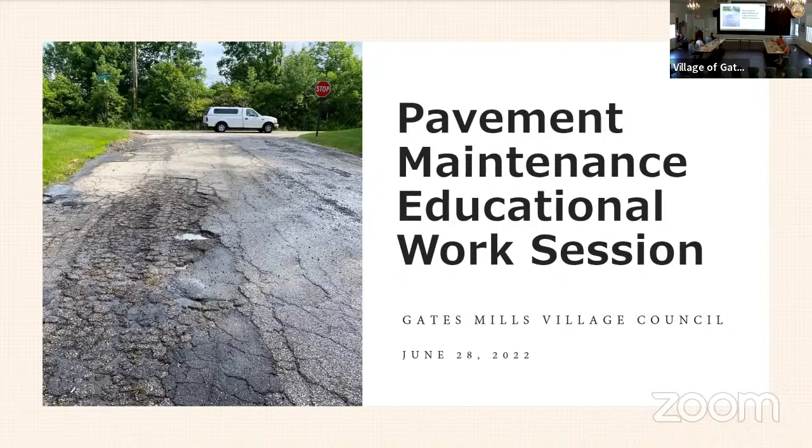Okay, so one of the things you'll learn about me is some people indicate that I'm the strangest friend that they have. My wife calls me a big goofball. I'm also a huge SpongeBob fan. So anytime I have an opportunity to work SpongeBob into a presentation, I do so.

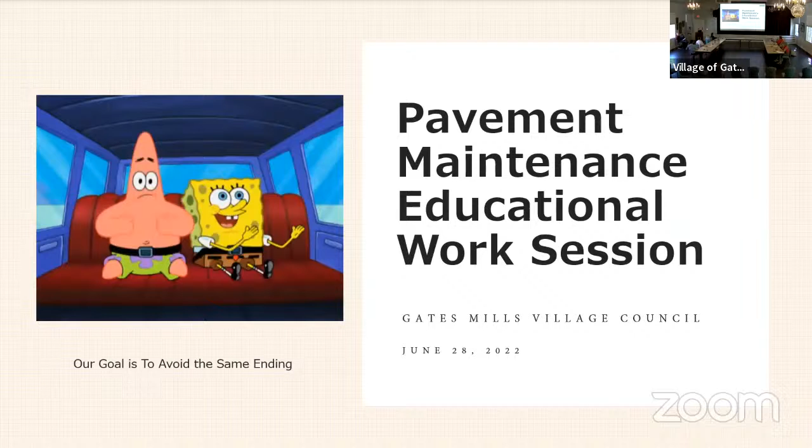SpongeBob's mom, by the way. Please stop touching my head. Let's all sing the road song. I wanna sing it all day long. Let's all sing the road song. Let's all sing the road.

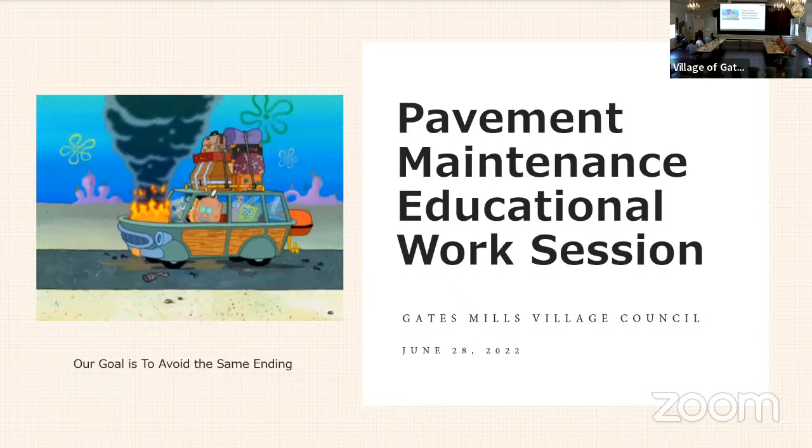Okay, so we want to avoid that. We want to avoid that ending with what we're doing. So if you have not been introduced to SpongeBob by your grandchildren or your kids, you now have, and I would highly recommend him. He's hilarious.

So there's a couple of things that we want to try to accomplish this evening, and that is to educate council about what road maintenance is, how it works, what the approach of it is, how we are talking about a philosophical shift in the way that we're approaching our road program in the village. Historically, we've allowed the budget to fulfill the need. We've used the money that we've had available to address as many needs as we can. We now have, through a village-wide pavement assessment program, determined need, and we're going to be discussing a budget number or numbers that would be appropriate to meet that need.

Also, what we hope to do is better prepare you to answer questions from villagers regarding their roads. People generally call and say, my road's in terrible shape. What are you going to do about it? And we now have better numerical data that ranks all our roads from worst to best. So if somebody calls and says, my road is terrible, that may be beauty in the eye of the beholder. Their road may be very much midway in our roadway condition as compared to others. So I hope to prepare everybody to have those conversations and have better data to do it.

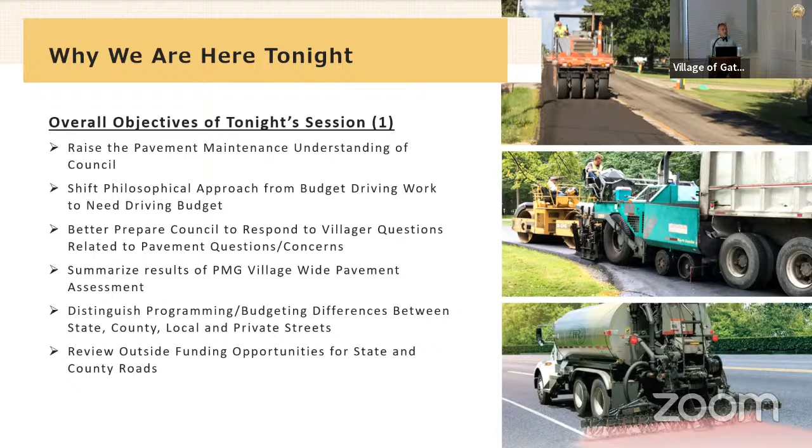I want to summarize the pavement management group roadway assessment that was done for the whole village, talk about some differences with the way that roads are programmed. Local streets are handled very differently than state and county roads from a rebuilding standpoint, and explain how those work a little more completely, along with discussing how outside funding opportunities work for state and county roads.

In addition to that, we want to talk about the pavement management life curve. Every road, and there'll be some graphs later on, but a pavement has a life. And the more effort you expend in maintaining that roadway, the longer it will last. Hence, you can extend the curve out further and further, maximizing the time before you have to get involved with the complete rebuilding of the road. And that's ultimately our goal of roadway maintenance, is to extend that timeline before we have to get in and completely rebuild a road for as long a period of time as possible, thereby trying to save some dollars in the meantime.

I'm going to talk about what a framework for an annual road program looks like, given the data that we now have based on a PCI, or pavement condition index, approach to looking at the roads. I want to discuss the overall objective that we're going to hopefully have, which is to raise our pavement condition index average for the village over time. Right now we're at 62, and ultimately what we'd like to do is get it up to 70, which is the low end of the good range.

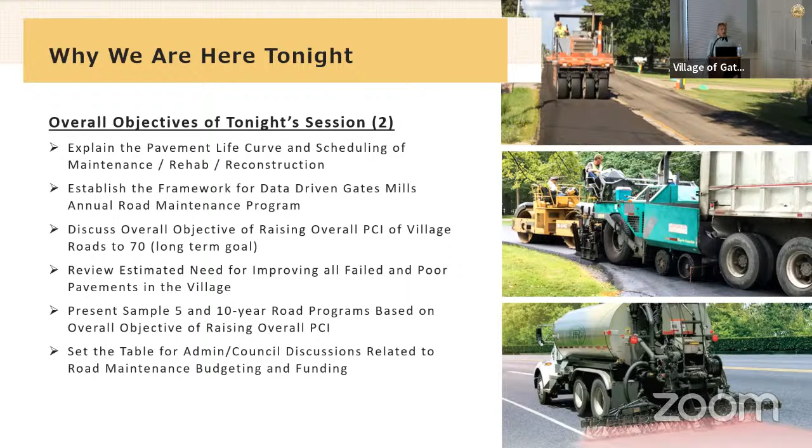Want to review the estimated need based on the pavement condition index analysis that was done. So we calculate what the total need is in terms of dollars to reconstruct roadways that are in the worst shape, and also present sample 5 and 10 year road programs based on the overall objective of raising the PCI. This sets the table for council to have meaningful discussions on 5 year, 10 year, how many dollars per year, whether we attack a certain type of road first, or segregate them into more discrete groups and allocate more dollars towards high volume versus low volume roads. That's the overall objective.

This may look familiar. This is just a brief overview of the presentation I did previously, talking about the pavement management group and what the benefits are of their program, really getting us to a consistent analysis of the roadways using a uniform process and artificial intelligence, as opposed to potentially different people looking at roads under different weather or environmental conditions, and having variability in the analysis that we can now remove. So we've got a much better analysis process in place.

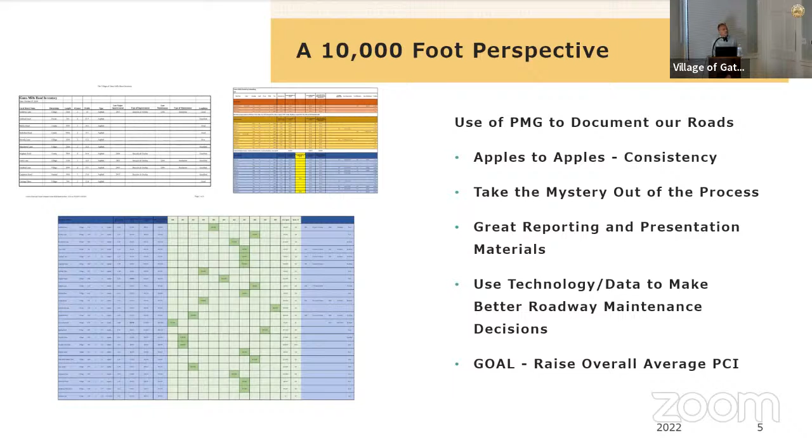Ultimately, what we're trying to determine is the best points in time and how many dollars we're going to be allocating to these various pavement maintenance activities. Reclamite and crack seal are used on newer roads that are in better shape to help extend the life - they're low cost treatments that can buy a lot of time towards the end of the pavement life. When you get into the more middle PCI roads, things like chip seal, fog seal, thin overlays, milling and filling either partially or the whole surface. And when you get into the lower PCI roads, it comes time to rehabilitate or reconstruct them.

The difference between rehabilitation and reconstruction would be, rehabilitate would be like what we did on Deerfield and Riverview last year, where we did a recycling of the existing asphalt and then overlaid it, as opposed to a pavement that may not be suitable for that, where we've got to reconstruct it, tearing out the whole road and starting from the bottom up.

So really where we are.

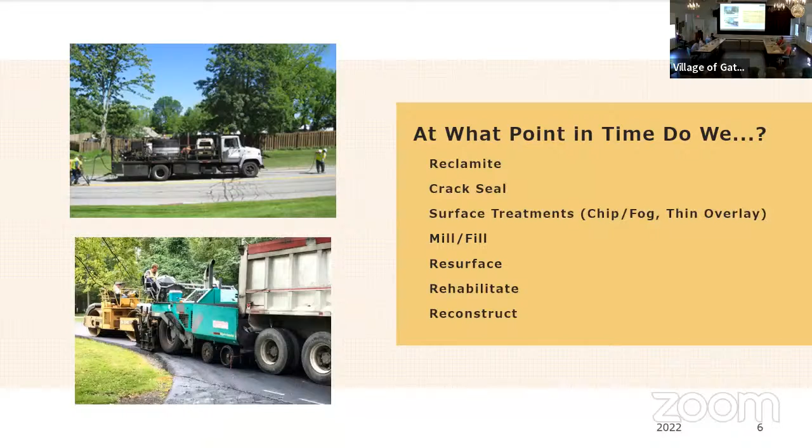Yeah, I've got that a little bit later on as I get more in detail on the pavement maintenance methods.

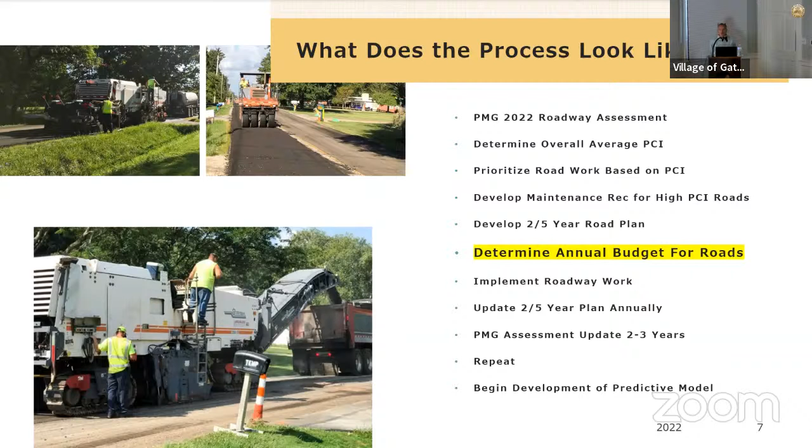Really, we've completed the roadway assessment, which I'll summarize in a minute. This evening, we want to discuss need and budget, as well as elevating the knowledge of council regarding the whole process. So that's really the focus of what we're looking at today.

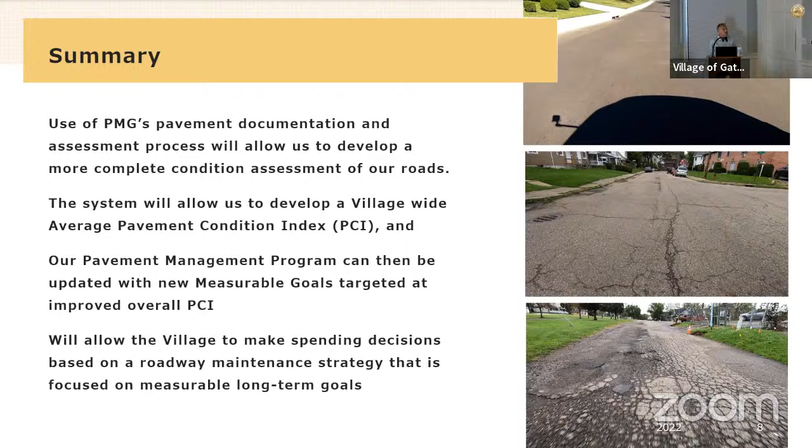So just a summary of the pavement management group, and what it will ultimately allow us to do - make better spending decisions based on a strategy that we've determined in advance, as opposed to being more reactionary, a strategy that's based on the long-term goal of raising the overall PCI, or pavement condition index, for the roadways in the village. That's the home run we're looking for.

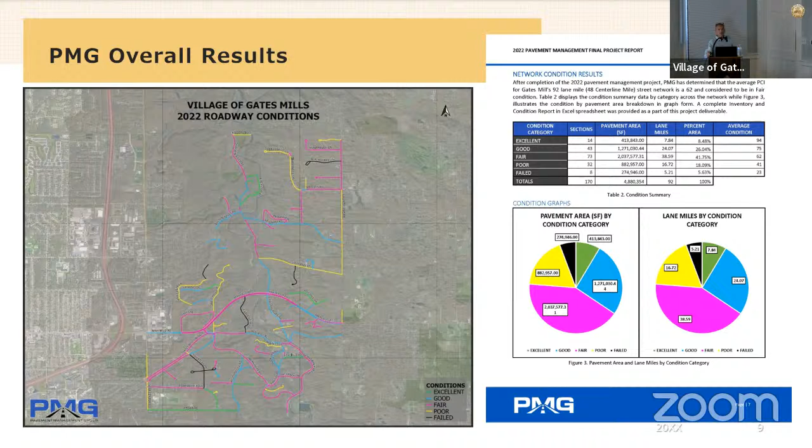So you can see that we've got a number of black roads which are considered failed, in need of either rehabilitation or reconstruction. Yellow roads are in poor condition, on their way to becoming failed. Really, everything black and yellow fits into the rehabilitation reconstruction category. Everything purple, blue, or green is either middle of the road or in very good shape, where we would employ life-extending methods to try to get them to last as long as possible before they slip into a failed or poor category, black or yellow.

Critical items we're looking at here—I've got a chart I'll go over next—but our overall pavement condition index is 62. That's how we came in for the entire village, averaging all village roadways including state and county roads, which I'd call pretty typical. Engineers I've talked to, when they've had this analysis done in their towns, have been in the low 60s overall. That's weighted by length of the road—a weighted average based on pavement area and condition.

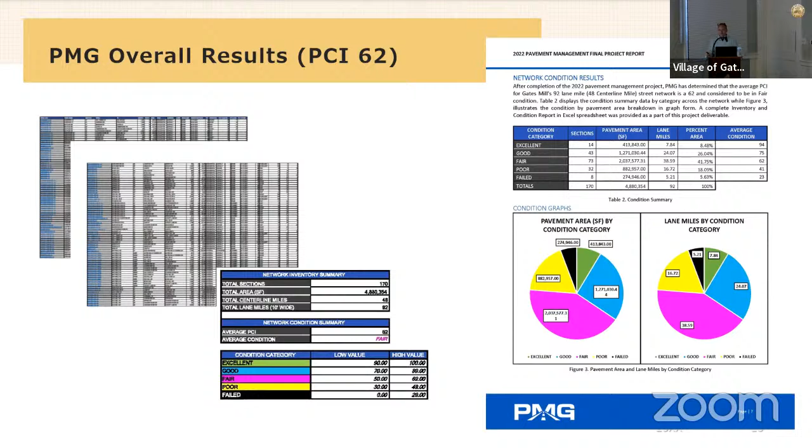So talking about lane miles, just to touch on that - Mayfield Road is 4 lanes wide, so 1 mile of Mayfield Road is 4 lane miles because it's 4 lanes wide, just so everybody's aware of that.

Looking at our lane miles by condition, you can see we've got 22 lane miles of poor or failed pavement. Those are the critical categories we're really looking at that warrant reconstruction. The other categories - excellent, good, and fair - are ones where we can use non-full reconstruction methods to extend their lives. That's a key part of the program: we want to invest money in those roads early in their life to extend their life before we get into fail or poor. I've got some graphs that show the pavement life cycle and how that works.

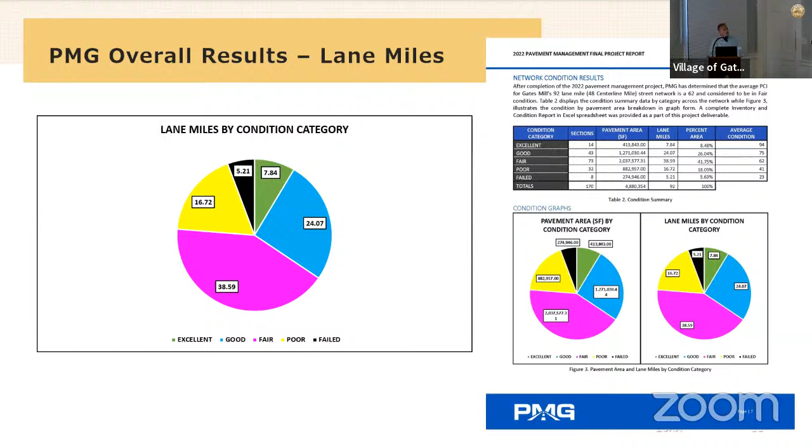The PMG evaluation is purely on the surface, right? Other than looking at surface deflection, their program wouldn't identify a load-based failure. It's based on video and then artificial intelligence analysis of that video. They don't do any coring or anything - that would come through the design process.

Chris, how does the 62 overall average compare to other villages around here, like Hunting Valley or Woodland Hills? I'm not aware of anybody in close proximity that has had it done, so I can't answer that question. But an example I've used in the past is the city of Green down around Akron. I've got a good friend who's the engineer down there, and I've talked with him extensively about this and his staff. They had their first analysis done - it came in at 63. They've got a pretty extensive road network, so I think generally we're about where the average would be.

Som Center is being redone right now. When that's done, the arterial or state route PCI will be up to 70 - right at the target number for our state routes, with the work done on Mayfield a couple years ago and now the work being done on Som. There's also some work we could potentially do on Chagrin River Road south of Old Mill next year that would elevate the county road PCI to 70 as well.

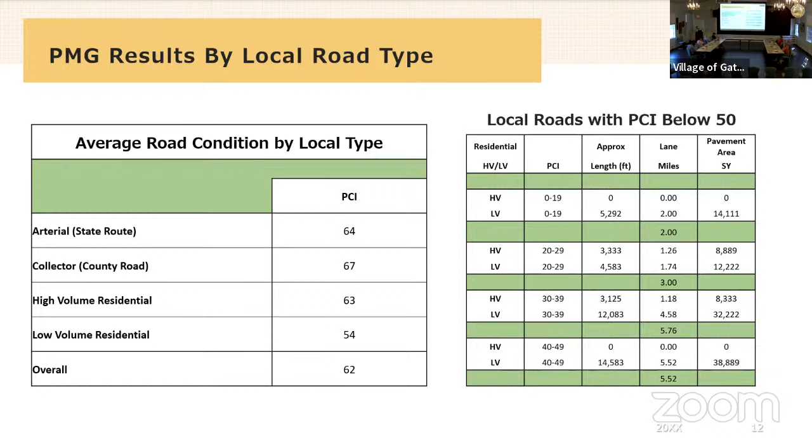The city of Kirtland, we developed an overall road rebuilding program for them. They didn't use a pavement management group, but more of a feet-on-the-ground approach to doing the pavement condition ratings out there. There's a $16 million 10-year program they're presenting to the voters, totaling about 16 million over 10 years. That's basically what my question is.

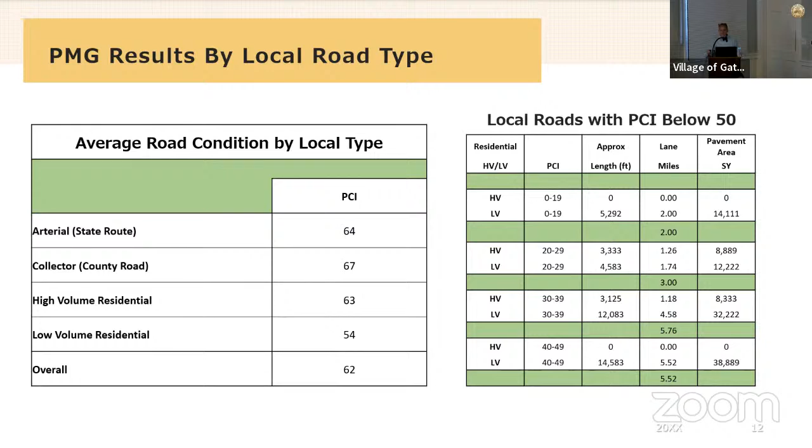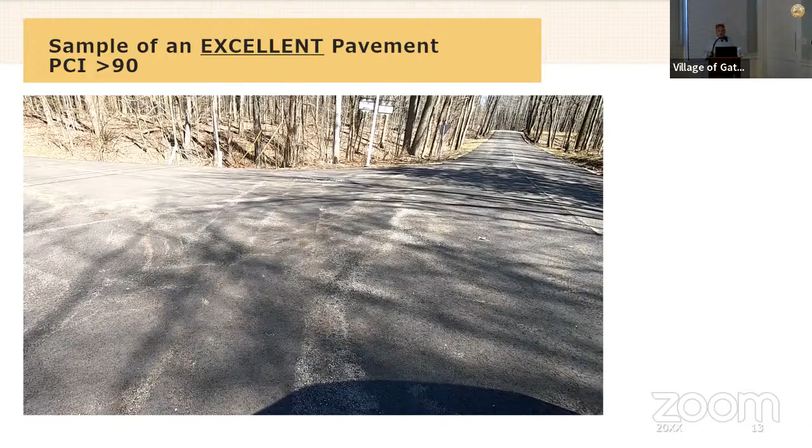So here are some roadway condition samples I'll show you. The first is a condition sample of an excellent pavement. This is a roadway we just redid last year. Don't mind the plow scrapes and rust on the road, but you'll see the pavement integrity is pretty good. This is Fox Hill. Those brown lines are just from the plow riding on the asphalt, but there's no real cracking on the edge. The pavement's in pretty consistent condition, with a PCI above 90, so it falls into the excellent category.

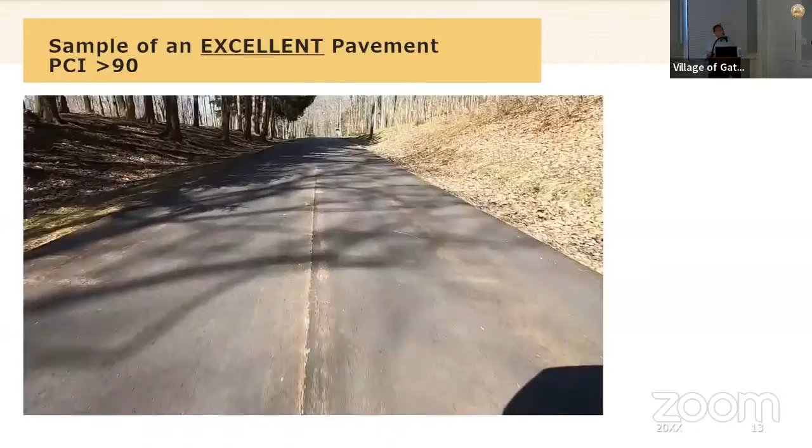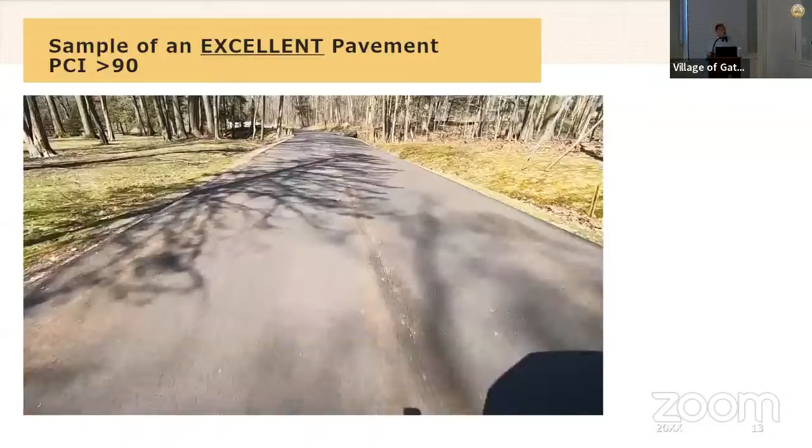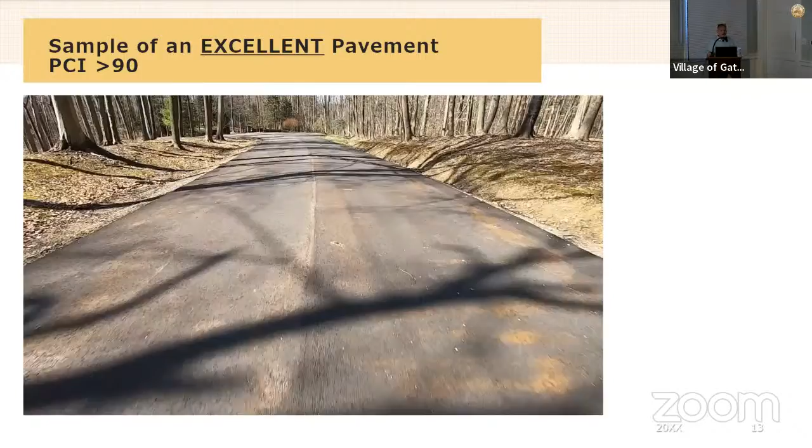So this year, as part of what we're doing, we'll be going in and applying Reclamite, which helps rejuvenate the asphalt, giving it back the things driven off when the asphalt is heated. It helps keep the surface pliable and extends the life of the pavement. That product goes down for about $1 a square yard, and it can extend the life of the pavement. If you do it every few years, you can buy 10 years at the end of the pavement's life.

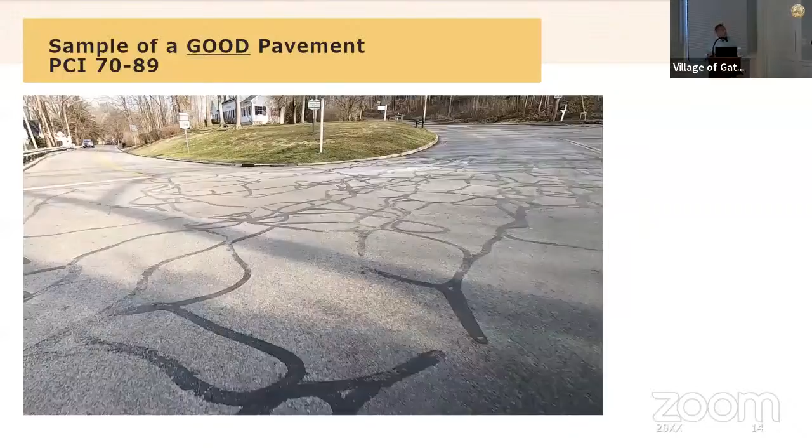Here's an example of a good pavement. This is Chagrin River Road north of Old Mill, the part that was redone by the state a few years ago. So you see we're starting to get some cracking. He's not driving down the middle of the road, the camera hangs out, and you'll see him swerve into it. Yeah, the first time I watched these videos, I had my heart in my throat.

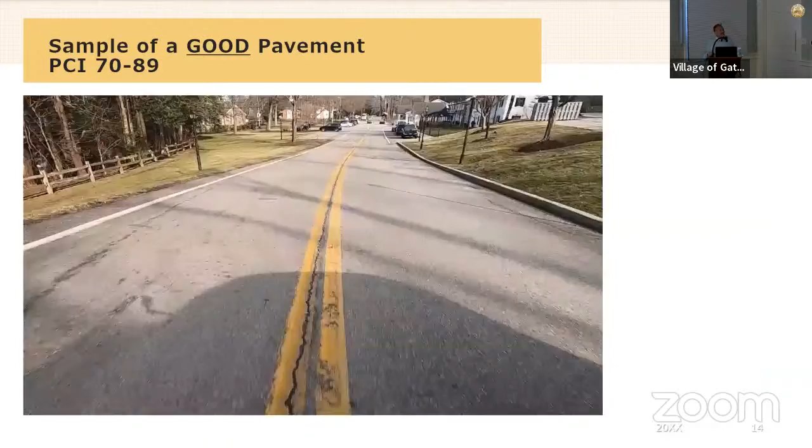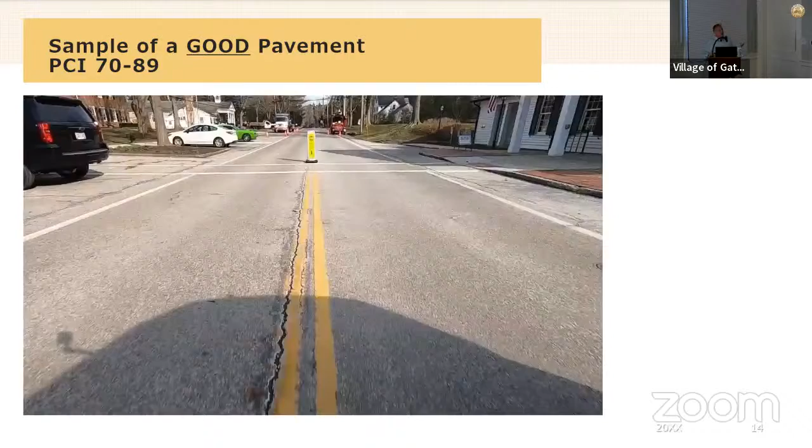You see some cracking along the center line. That's where there's a construction joint, where the two asphalts butt up against each other in the middle of the road. You're going to see some cracking, which is an identification point, we've got to get in here and start crack filling because we want to fill those cracks and stop the water from migrating down into the road.

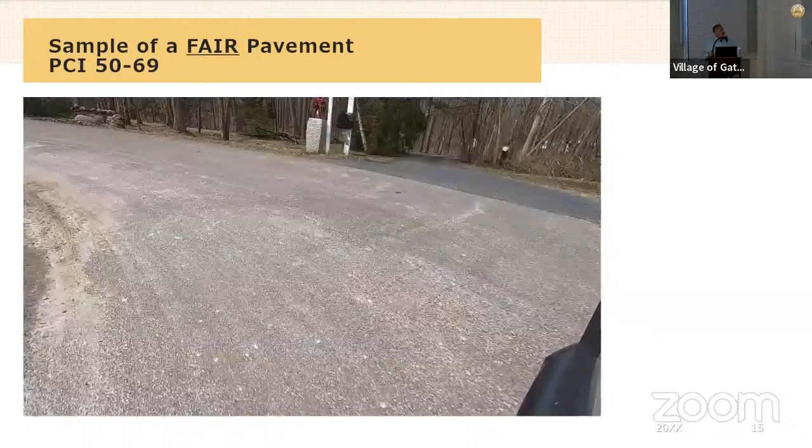Here's a fair pavement. Nice work, Karen Lane. That trench is a repair we made when we did the storm sewer work and regraded the cul-de-sac a couple years ago to fix a drainage problem. So this part of the cul-de-sac is in pretty decent shape because we just did some repaving. But the rest of the road, you can see that edge cracking I was talking about, which is pretty predominant along the edge of the road.

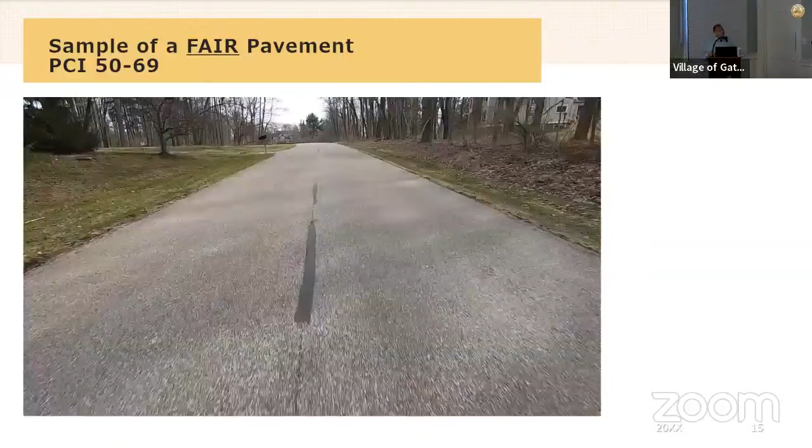That's pretty indicative of a base problem, so that's where you'd get your load-based failure. Just to pause, what would we do on this road to maintain it and prevent it from falling off the edge? So it falls into the fair category.

What I'd suggest in these instances would be a good candidate, not for full reconstruction or full rehabilitation, but this is where we'd come in and do a full depth repair along the edge of the road in order to better support the asphalt on top, then take off and put back 2 inches. That mill and fill of the surface is considered a maintenance activity, so it'd be a good candidate for full depth repairs along the edge, and then a mill and fill on the surface.

Maybe as you get to a section, pause where you would... that be one? Because it's hard to pause the video, so.

Okay, but yeah, so those areas we see all the cracking along the edge of the road, essentially they'd come in with either a mill or a backhoe. They do a saw cut and remove 8 to 12 inches deep. We'd put back in stone and asphalt along the edge of the road where those areas have failed. So we stabilize that base.

And then because we've got this general surface cracking that's more environmental, as you get to the middle of the road, we would take off that wearing course, 2 inches thick, and put back 2 inches on top of it. So those are the things I was trying to point out on this road. You can see an awful lot of the road is fine.

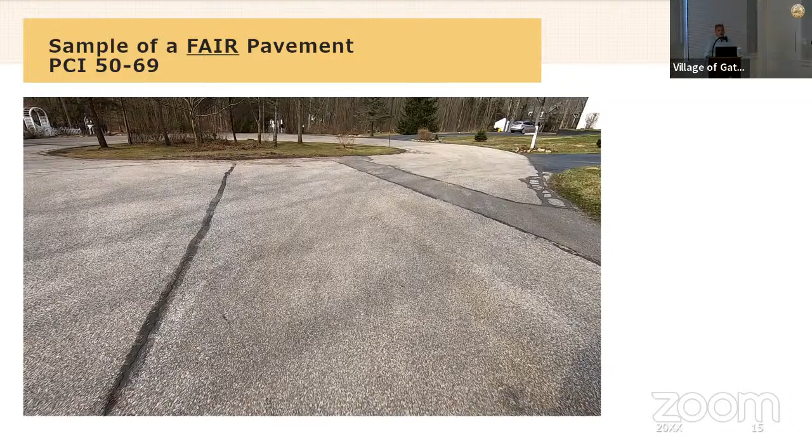But here's the challenge: there's what, 8 houses on Cardinal Lane? So low volume residential. That's an example of a low volume residential road.

Dorchester has probably 30 to 40 houses. So this is, if you recall, we repaved the portion from Chartley to Cedar last year. We did a 2 inch mill and fill on it. So this is the portion that is between Somme and Chartley. That one's probably 20 houses, I don't know—well, 19 plus the lake.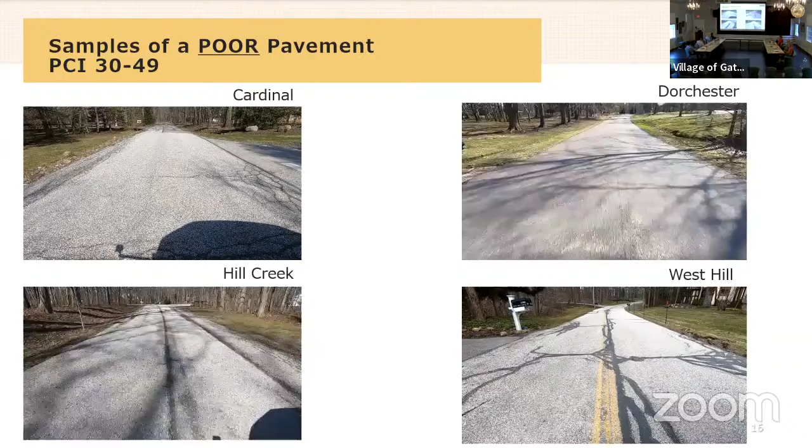So, Michael, I see that, and from an engineering or structural standpoint, yeah, well, we got to work on it. But in driving that road, it's not like you're hitting huge potholes or anything. So that's where I struggle—I certainly don't want all the roads in the village to be a rating of 40, but I wouldn't call that the worst thing I've ever seen either. So I don't feel like it's an emergency, I don't know. I mean, that doesn't look so good. Yeah, right, there's areas of it that are in terrible shape. Right.

So Chris, what's the average road—I think about what Hunting Valley and Russell did, and their records went back to the early 80s. They couldn't find any point when that road was ever touched. And I think about Hill Creek and West Hill, all those developments were put in the early 90s. Obviously, that's all original roadway.

So listen, the average road is 40 years, you've got to dig it up and start over. Yeah, I mean, average road life typically is going to be around 30 years. Well, I'm going to say it's somewhere between 20 and 35 years, depending on how aggressively you maintain it. Hill Creek was part of the water program.

Many of these roads have been resurfaced, so they may have gone in at that point in time, but they've been resurfaced since then, either as part of a roadway project or as part of the water line project.

Roadway failing, how many times can you go in and mill and fill a road before it's completely shot and we've got to rip it all out and start over? You can get away doing that once or twice, or?

It depends on the type of failures that you have. If you're getting more environmental based failures that are top down, you could probably do that for almost an indefinite amount of time, as long as you've got a solid base underneath the road. If you've got a road with a lot of base problems, you're better off recycling it, stabilizing the base, and then putting a new surface over the top.

So Chris, one of your possible suggestions for us to be mulling over between now and our council meeting in two weeks is Dorchester. Now would we do all of Dorchester or some specific sections? When you lay out a big chunk of money for Dorchester, what are we getting for that?

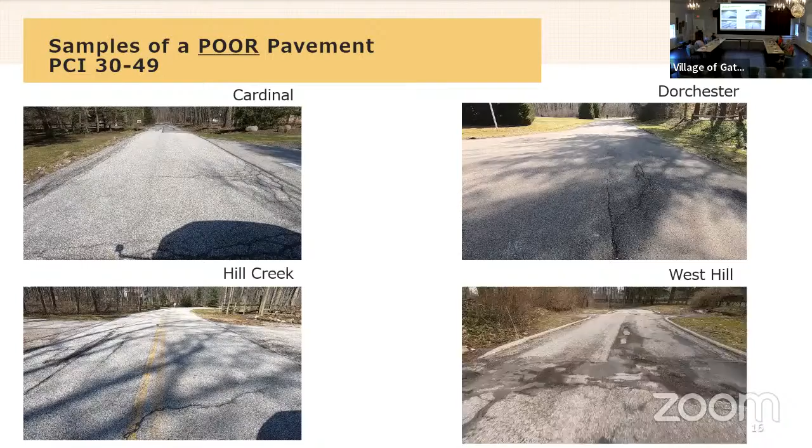So I've got two thoughts on Dorchester. One is to do what we did last year on the portion that remains, which would be to do full depth repairs and then do a 2-inch mill and fill on that portion of the road.

Or there's a process, because I'm looking at alternative methods for trying to buy time to maintain roads, because asphalt prices are through the roof. We just took bids in Kirtland for the road program for this year. Last year, asphalt was $80 a ton. This year bids are coming in between $130 and $160 a ton.

So is there something we could do that would allow us to redo the surface without spending a ton of money on asphalt? There's a process out there called asphalt surface recycling, as opposed to recycling the bottom of the road and putting new asphalt on top. You can heat and peel off the top 3 inches, mix it with new liquid asphalt material, and roll it back down like a new surface.

If we were to do full depth repairs, limiting the amount of asphalt we have to buy to those repairs, and then recycle the surface, a road like Chartley would be $350,000 to fully reconstruct. If instead we do a series of full depth repairs and recycle the surface to try to extend the life before we have to talk about reconstructing it, we could probably save a couple hundred thousand dollars.

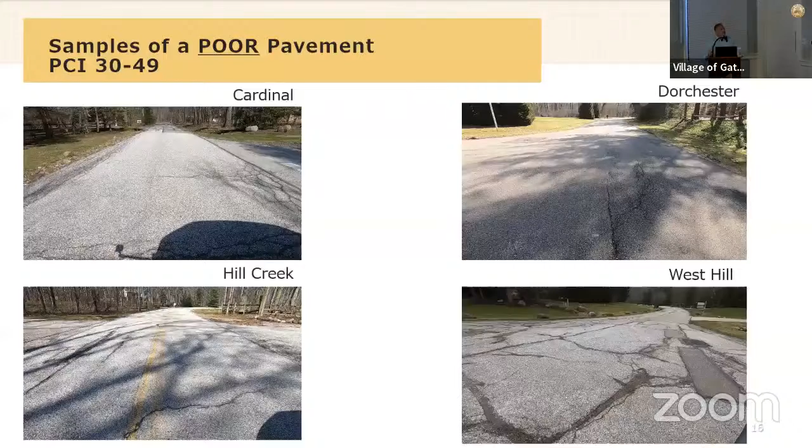Just an example. So Chris, when we go out for road material, are vendors going to come back with those options? I'll give them that option. The way we've got it set up, the road program is set up so that we have streets in separate sections using different methods, and we've got the ability to award those sections independent of one another.

So there'll be an option for resurfacing Road X or doing a surface recycling on Road X. Then we can look at how the pricing comes in, balance how those look compared to what we want to accomplish, and make an award based on what we think is best. They're supposed to be using that method on 5 or 6 different streets down at Richfield in the next couple weeks, so I'll be down there watching that closely.

Good, thank you. Here's some examples of failed pavements. We've got Blackberry Lane, which is up on the county line, north end of the village. This is one of the worst roads we have in the village. I think the PCI is down around 14. But it's a cul-de-sac street, services about a dozen homes.

And you can see that it just got cracking all the way across the road, a lot of edge failures. So you can see why the PCI would be very low.

It's interesting, Karen forwarded an email from a resident on Blackberry asking when are we going to address the road. I sent him one and said we're working on it. He followed up a month later and said getting closer. I said we're working on it and we're very aware of the condition of Blackberry. And he emailed me back and said, I was actually talking about County Line. So apparently he's fine with Blackberry. He was focused on County Line, which comes out on...

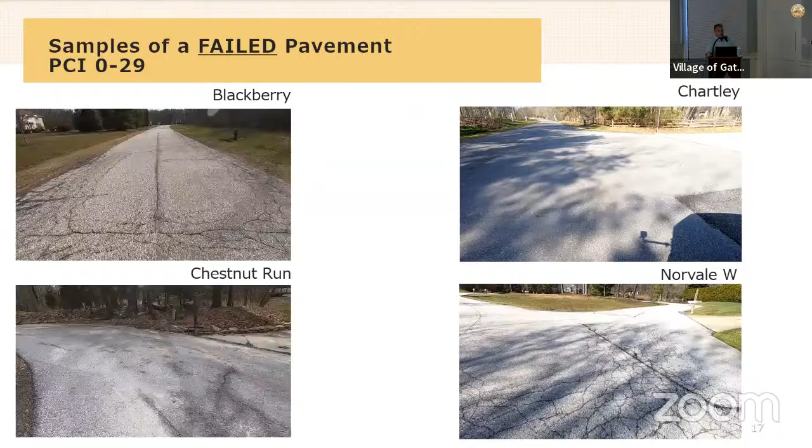So just other examples of failed pavements. I think you guys get a pretty good idea what a failed pavement looks like as compared to a good pavement. Well, that's really bad. Now let's show Chartley, because that may be on our list to debate here soon.

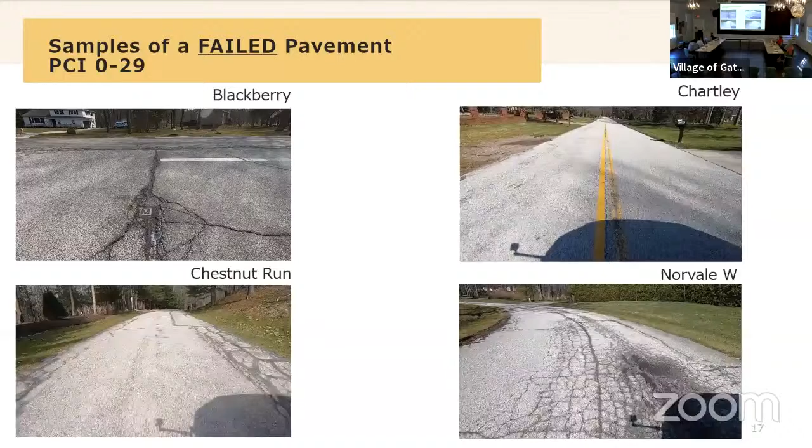Again guys, the dilemma is Blackberry is a cul-de-sac, there's X number of homes. Chartley is a pass-through road. Independent of the fact that the mayor lives on Chartley, you get school traffic and an immense amount of it—it's unbelievable. So you get a good feeling for what the failed pavements look like before I get into the meat of what's going on.

If we put a road in and do nothing, we'll be rebuilding it in less than 15 years, more than likely. But we have a lot of streets in our village that we haven't done very much of anything to—in other words, they're older than 15 years. I mean, we do crack sealing, we've been actively milling and filling, we do patching. So there's been maintenance activities going on that are all life-extending activities.

So I've been pretty aggressive with reclamite over the last 10 or 12 years especially. If you look, I think Gates Mills Boulevard is a terrific example. That road is nearly 15 years old now, and it is a good example of a fully reconstructed pavement.

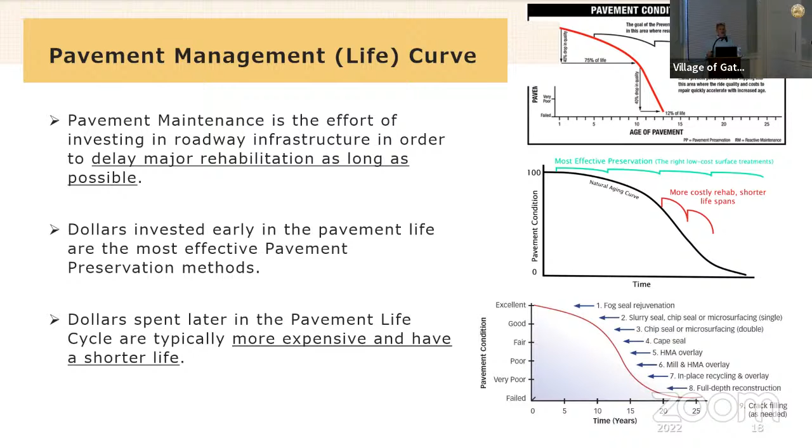It depends on the road and the environment, right? Like a road like Gates Mills Boulevard, the portion that is closer to Som is likely going to weather slower than the portion closer to Old Mill. The portion closer to Old Mill is in a lot of shade, it stays damp a lot of the time, different environmental conditions. Riverview, that we just did last year, is fully shaded. The back portion of that road was by far the worst as a direct result of the environmental conditions, the shade, and the fact that it's always damp back there. Water and pavements do not go together very well.

So what are the maintenance methods that we employ? We've talked around this. So at PCI 90 and above, we're really looking at life-extending, cheap maintenance methods: Reclamite and crack seal.

PCI between 50 and 89, the middling type roads, we can just still do reclamite and crack seal, trying to extend their life. We get more involved at this point with hot spots where we've got to go out and mill out and replace either partial or full depth areas that are in bad shape that we select. So we may do one lane over a 20 or 30 foot length and kind of leapfrog around, which we've been doing a lot of recently, or potentially removing and replacing the entire surface, either through a 2-inch mill and fill or an asphalt surface recycling.

You can see the difference in those two methods right there. That asphalt surface recycling is more like $15 a square yard. The 2-inch mill and fill is more like $50 a square yard, and on the increase with the change in price of asphalt.

Below 50 PCI is our poor and failed roads, where we really have to do a full depth recycling and overlay, which would be about $60 a square yard or $455,000 a lane mile, or complete removal and replacement, where we've got to tear out the old road, start from the dirt, make sure the dirt's in good shape, proof roll it, where we run a fully loaded dump truck over it, fix any soft spots, start with the stone, then all the way up with the asphalt. Much more expensive, complete road rebuild at that point.

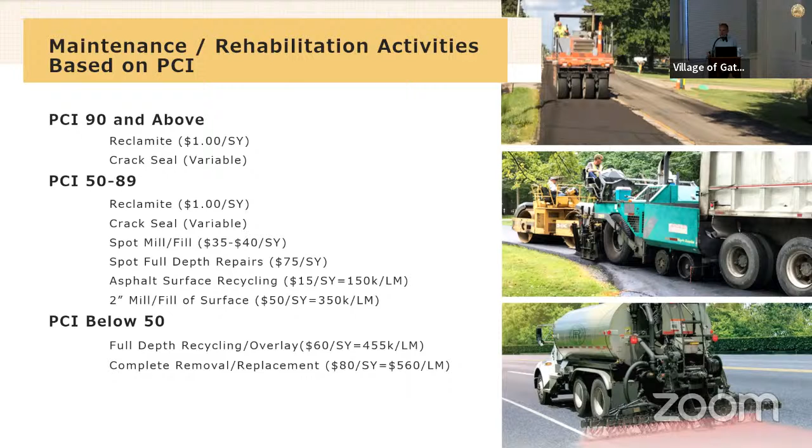And those numbers you just showed, you've updated for what you think is close to current asphalt cost. Correct. And remember that oil is a big driver for asphalt cost. So just look at the cost of a barrel of oil and we all know what's happening at the gas pump. I don't know if it's an unusual time or this is indicative of where oil will always be, but we're talking to some people that probably know that better than most people in the world. So, well, there you go.

So where do we stand at this moment? If we look at a pavement management strategy that's going to elevate our PCI to 70, where does each one of the categories that we have stand right now? As I mentioned before, with the completion of the ODOT project on SOM, our state route average PCI is going to be 70 or 71, which is terrific. I think that puts us in a real good spot. County roads, we're currently at 67.

So I've talked to the county about a potential project for next year where they would pay for 50% of the asphalt surface recycling, the peel off 3 inches, heat it, mix it. They would pay for 50% of that under the county maintenance program, where we would be able to redo the top 3 inches of Chagrin River Road south of Old Mill all the way down to Hunting Valley. The cost of the project would be probably about $240,000, and we could likely get the county to pick up half of that.

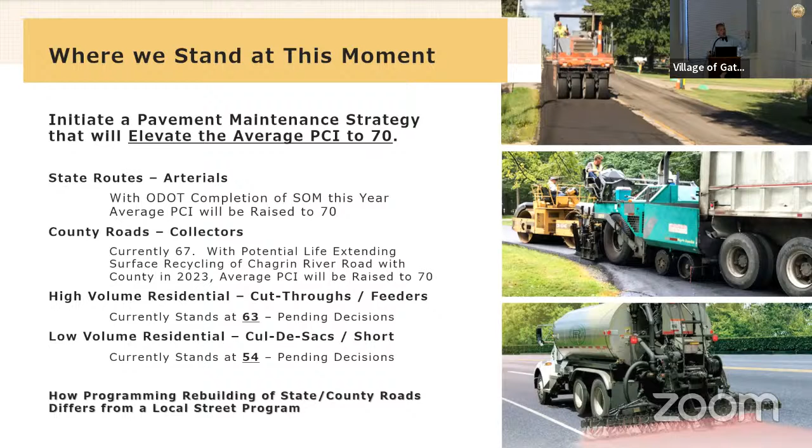So those fall into a different animal and become separate projects that are really apart from our annual road program - those state and county road jobs.

So what does the annual road program look like? One category is county road maintenance, and typically we get about 50% of the money back from the county because they reimburse us for 100% of the material that we use. Another is Reclamite and crack sealing on good to high PCI roads - that's PCI above 70 - where we're investing low dollars to extend that life curve as much as we can. Then we get into a third category with our middling roads.

In that middle category we're doing spot mill and fill and full-depth repairs to address hot spots - a bad area here or there on the road, but the rest of the road may be in pretty decent shape. Then there's complete surface removal and replacement, or surface recycling, for roads between a PCI of 41 and 69, depending on the type of failures we have. The last category is rehabilitation or reconstruction of the low PCI roads, under 40 or under 50. I've got a chart that expands on that category on the next page.

So this is really the big number here. The first half of this chart looks a lot like, or is the same chart you saw on the previous page, but now I've extended it out so we calculate the dollar value of the rehabilitation or reconstruction that would be needed to fix those roads, because they're either failed or poor and need to be recycled and overlaid, or fully reconstructed.

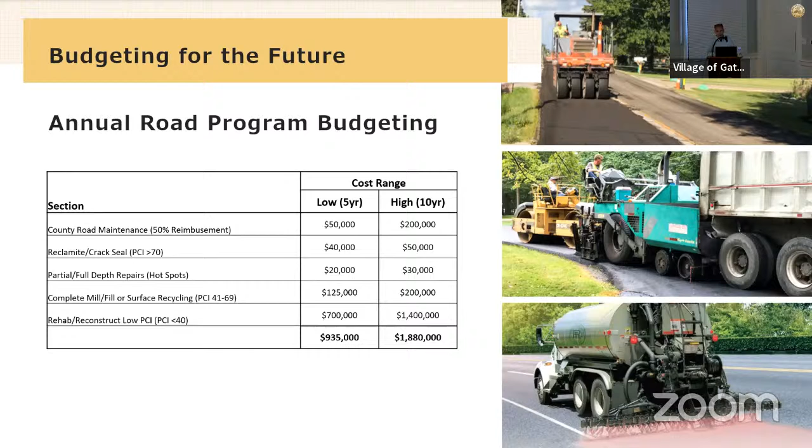So Chris, this is kind of what you were talking about at the beginning of changing, and you said it a minute ago, that the changing of the philosophical approach from the budget driving the work to the need driving the budget. Is this something, again, that you could project? This is for a year, we have this information, this tool, for a year. But again, how far out could you go, if we changed it so that the need is driving the budget, what you just put up there, for how long, how many years would that be?

My suggestion would be that we determine what that first slug of work is going to be. So let's just say 5 years. We determine a specific number of roads we're going to do, what our approach is going to be. I need to know what the plan of attack is and what the budget is going to be. And then based on those parameters, I can run some analyses showing what impact that's going to have over that period of time.

So in a perfect world, council says, okay, we're going to commit to $950,000 a year for the next 5 years. And we want to address the low PCI roads, starting with a 75% allocation to the high volume residential roads and a 25% allocation to the low volume residential roads.

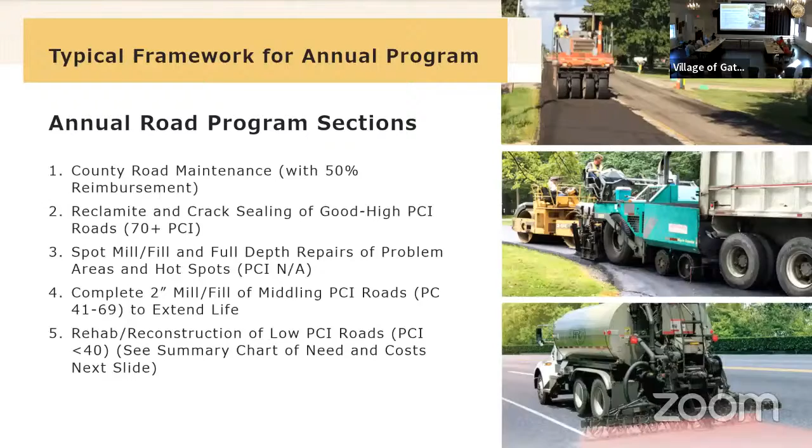Again, that's for the high volume and low volume residential roads in each category of PCI. But you see, by far, low volume roads with a PCI of 30 to 49 are really the two categories with the biggest numbers. You look at the number of streets involved in each category and then the number of homes on each street, it gives you a feel for it. It's really the low volume PCI roads between 30 and 50 that have the most residents.

Two questions. Sure, go ahead. Chris, are you going to send us this slide deck? Sure. The numbers are a little fuzzy for me.

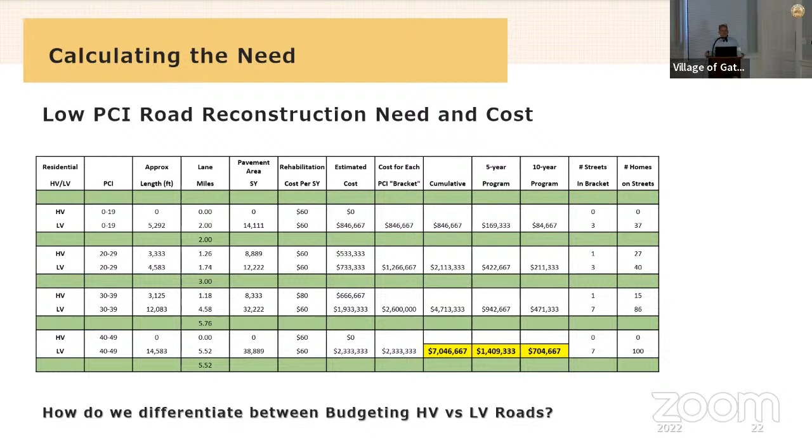And then the second question is about the council meeting in two weeks. Chip, what are you going to be asking of us at that meeting? Well, you don't think we're going to get the bids back? I don't think we'll have bids back by the next council meeting. It'll be either a special meeting we can talk about at the next meeting, or it'll be the following meeting—call this the 2022 program. Will these dollars be spent during 2022, in part, or?

It would all be 2022. Once we let the bid, they'll size everything up and they'll do the work. At this point, probably September. We always close the contract and have everything paid out by the end of the year.

Sandra, I just learned in conversation a day or two ago that we weren't likely to get our detailed bid, so that's going to put a little bit of a bracket on things. As he said, in some cases he's seen $130, in other cases $160 a square yard, or whatever the measurement is.

I guess with this education, guys, I don't want this to be just Chip's program, I'm trying to wrestle this with everybody. I'm kind of intrigued with the bang for buck we get on something like doing Dorchester and Chartley. One of the dilemmas is you can't do a little bit here and then 30 miles over, do some there. The construction guys don't want to just do 5 minutes of work in 20 different areas, so you try to do some grouping geographically.

On the other hand, whether it's Carpenter or something like Blackberry or one of those others, we've got a few to choose from. I'm sort of prone to do a little of both and maybe come back to council with, guys, I think we need to spend 800 to 900,000 this year, but I'm a little bit optimistic that so far our revenue is running higher. David, you want to...

Do an update after 6 months. Where are we? Are we running ahead or behind on things? I think it's a great time to do that. Once we have the results, I don't think we ought to do that in late August. We could do it in mid-July, and maybe have a 10-minute special council meeting once we have the data. It shouldn't take too long with this framework to say, here's what we specifically want to do so they can get moving. That's sort of my guess here.

I just don't know, maybe I'll be that definitive in the July meeting. We're going to fool around with this a little bit, but this is the time. What do you think, guys? You see a variation of options. Chris has done a nice job of giving different ways to think of this. So we could look at it more closely and discuss.

Yeah, and so we have real numbers. My plan is to have numbers for everything you see here so that we can make a decision based on real numbers that have been bid, and look at how much that 2-inch mill and fill would be compared to the asphalt surface recycling, with specific numbers for each street regarding alternates, and then make a recommendation based on what the most intelligent spend is.

Excellent job, this is terrific information. I think so too, I think you're definitely using a very interesting approach. It's very helpful to help us think about this.

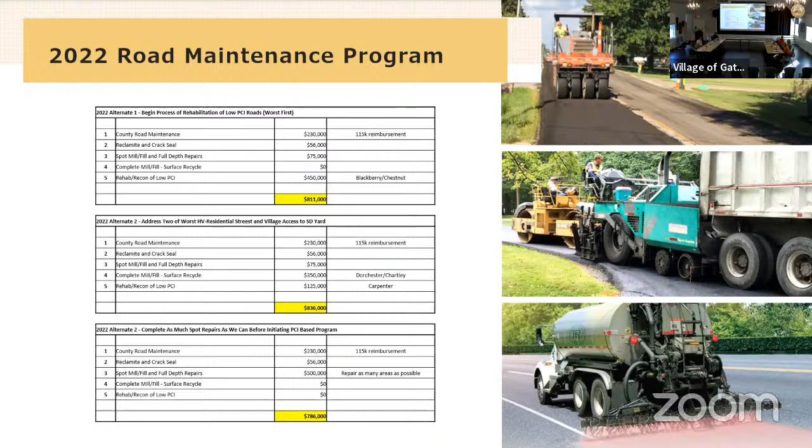To this point, we haven't actually specifically talked about a particular road, we've asked questions about particular roads. This data, just to tell you what the roads are, you've been dealing with it abstractly, which is very powerful. Then when you come to fix specific roads, maybe we'll have some input from the questionnaire, by area. I don't know, there might be a lot of good information there, there might not be, there might well be, which could color this thing slightly.

This is certainly better than we've ever had. Well, no, it really is. It's so much to chew on, and that's part of the problem. It's so much to chew on. You can get the whole big picture, it's a 3-dimensional model here to some extent.

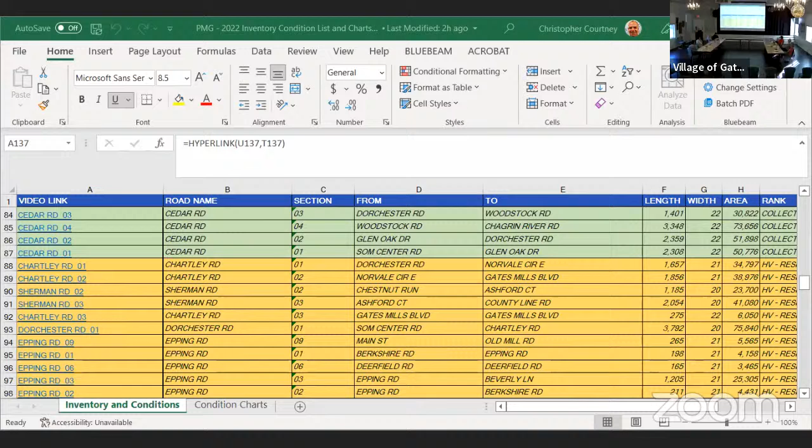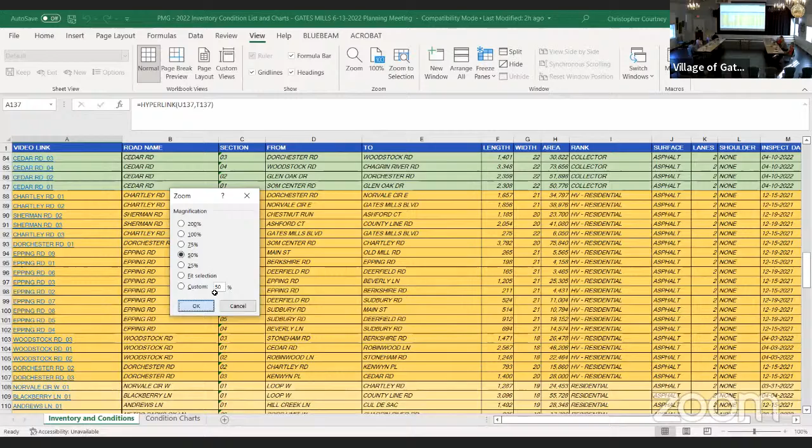What Chris laid out there, I guess I'm kind of prone to begin to attack some of these rather than just spend 500,000 with a little bit here and a little bit there and a little bit there. I almost view that as a Band-Aid, but I don't know, Chris, because it's hard for me to translate that into what that really means.

You look at some of those videos and see some of those sections and say, oh boy, it'd be really nice to get out and do those. That's what he said, that 500,000 would go all around the village, but it'd be 2 square yards here and there, not very efficient. Yeah, I mean, we would have to... I don't think it does.

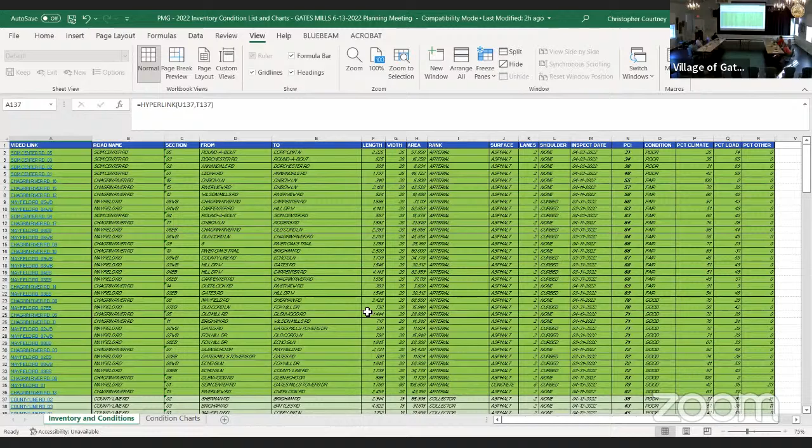So this gives you a good look at what the spreadsheet looks like with the specific roads. Once I've manipulated it, dark green is all of our state routes. And it looks like a lot of state routes, but each road is broken up into discrete segments between intersections or between distinct points, because many times the road sections are in different conditions. And it makes some of the video management a little easier. So the dark green is our state routes.

By the way, everybody can get access to this database, right? Yeah, I'll send the email out so that everybody can get into this.

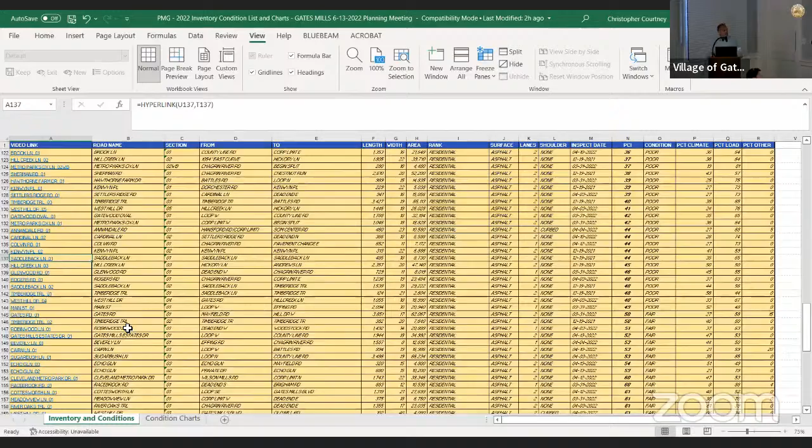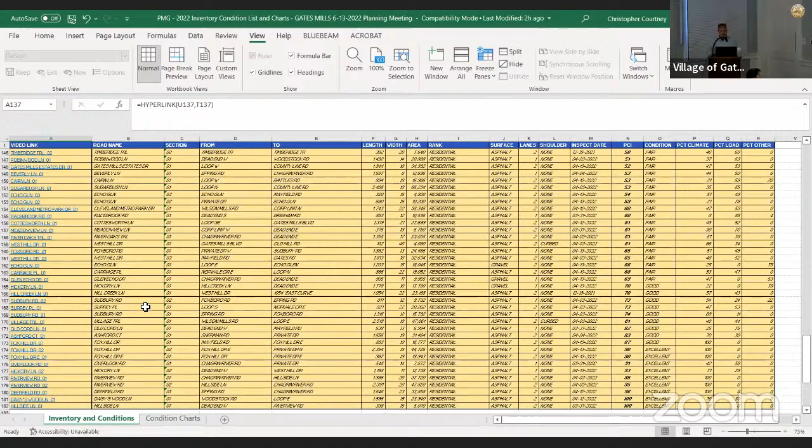There's the lighter green, which is the county roads. And these are rated from low PCI to high PCI. I've sorted them that way. The darker yellow is our high volume residential streets. And then, which we have the most of, the lighter yellow, is our low volume residential streets. So you can see our low volume residential streets make up by far the largest portion of the roadways that we have. It's also the lowest PCI average that we have. So we're kind of working against the current when we've got the most roads with the lowest PCI, and that's where we're going to get our most bang for the buck in terms of raising the overall PCI.

Now, when you send us the link to this file, can we click on this road and look at a video in my home? You can. Like right here, if you want to see if it works with this version that I have. So you just click on the link and it brings the video up of that portion of the road. Oh, it's running on my computer. It's not running up there, sorry. Wow, so it would run on my computer at home if I did that. It works.

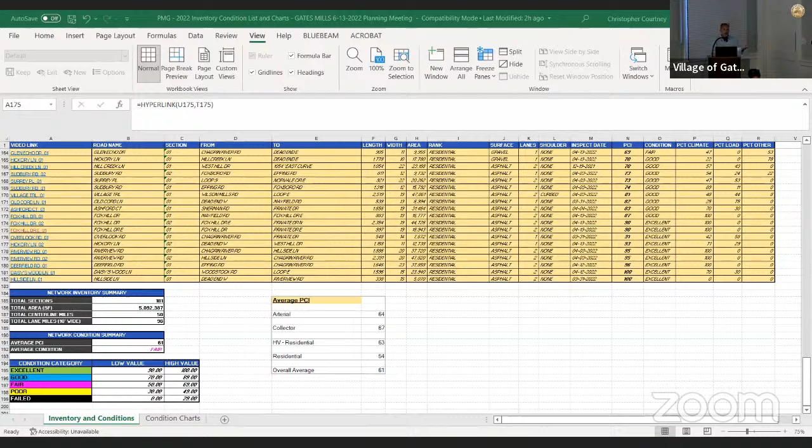And there's also a feature - it loads up all the video segments into Google Maps. So if you recall the map that showed the entire village with all the roadway conditions, it loads up all the video on a Google map that's got little nodes all over all the roads. And all you have to do is go to one portion of the map, click on a blue dot, and it loads the video up for that section of the road. So it's very handy. If somebody calls and says, I've got this question about this portion of the road, I can look at it right from my desktop. So can Dave, so can anybody, as opposed to jumping up and running out and taking a look at it.

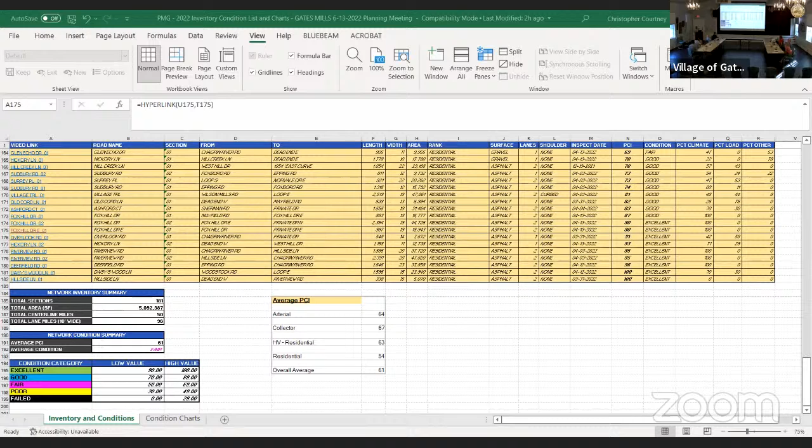So maybe what I'll work with Chris on is a couple of different options. So option A, here's 2 streets, here's 3 or 4 streets, and we'll do a quick video. And then here's a different option of a couple of streets. These general things where we're going to reclaim and things like that, obviously, you'll just have to assume that he's doing the right streets for that money.

And just frame it, and maybe we'll come in with 800,000, 900,000. I guess I'm prone to come in at about that range. I don't know what your gut is from what you're seeing tonight. I think we need to spend some more money. We clearly have a surplus at the moment. I don't mean on a budget, but we've got some extra cash at the moment. So I'd rather get started a little bit, not just do what you said, Craig, which is just not really make any headway, just spread the money all around a little bit here and there.

Again, this whole meeting tonight was obviously to educate. You're getting a good framework. You see the kind of data, and that helps us make at least a start towards a more intelligent decision even for this year. I think it was critical for you to have as much context as possible as we go down this road. And if I'm going to come forward with a recommendation on pavement, I want you guys to understand how that fits within the big picture and be working towards a strategy that we're all in agreement with, so we're all pushing the same direction.

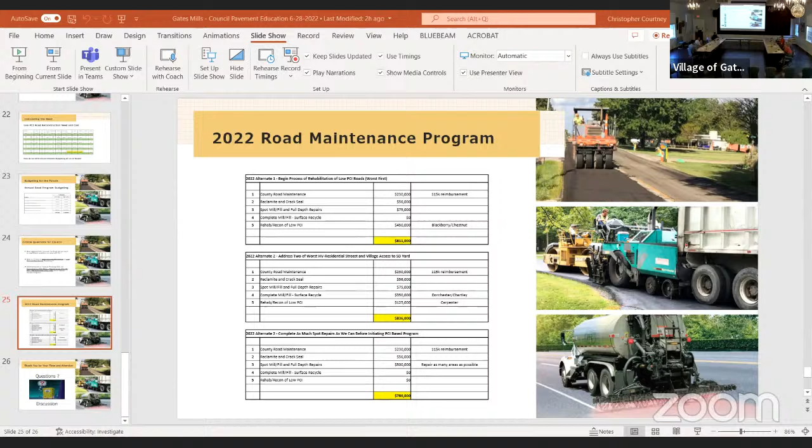Thank you. Thank you all for waiting for me. I would have hated to miss SpongeBob SquarePants. But if I'm late again, please go ahead without me. I don't want to - you've earned yourself another SpongeBob video for the next presentation. I'm going to go home and watch it. I don't watch it.